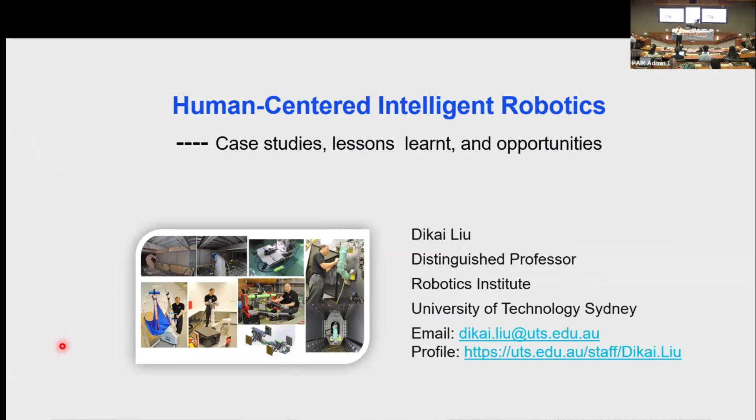Welcome, everyone. I think it's my pleasure to introduce my colleague for more than 20 years, Professor Dikai Liu. And if you read the CV, it's very comprehensive. I try to use my memory to introduce him. He has done research on robotics more than 20 years. He does both theoretical research and application, and most importantly, he has developed a number of industry robots applied in the real world. And later on you can see the video. I expect that, and he also gives a high-level summary about robotics, because we know there's so many robots, so many research areas, so many applications. He will give our summary. He has authority to do that because he has done this research for so many years, and normally we claim he's

maybe he's the #1 for robotics in Australia. And so he not only has good publications and good applications, he has a lot of media coverage. So later you might see some, and also real applications in many areas. And especially he's gotten a lot of awards. So from these 3 dimensions, I think he has done brilliant work. So I feel proud to introduce him for this seminar. I wish everyone, if you don't work in this area, you'll still feel this hour is worthwhile to come and listen to this seminar. Especially you can see the cases, lessons, and opportunities, and talk about human-centered intelligent robots. So I'll give him more time, and people will learn from his talk. Thank you very much. It's your turn.

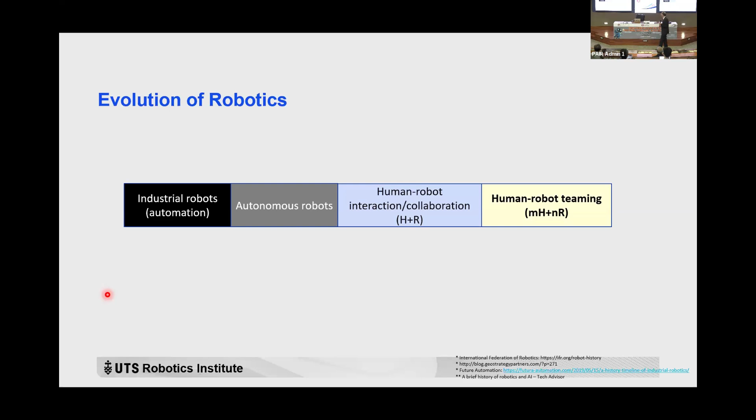When intelligent robots get into our daily environment, one very important aspect is that the robotics research we are going to do, or the robots we're going to develop, needs to be human-centered. This really makes robotics research a truly interdisciplinary area, because humans are one of the main focuses in intelligent robotics research. And when humans are involved, we have human behaviors, psychology, ethics, and culture. All of this should be considered in robotics research. This is really where we can see more and more collaborations among researchers across all those research fields. So human-centered intelligent robotics has become more and more popular, attracting attention not only from researchers, but also from people like engineers and others.

We have been seeing videos or news about autonomous cars or humanoid robots. Those autonomous cars or humanoid robots are designed for humans, but they may not take enough human aspects into account. So human-centered intelligent robotics really need to prioritize human needs, like human values or capabilities. This is one of the significant differences between autonomous robots and human-centered robotics.

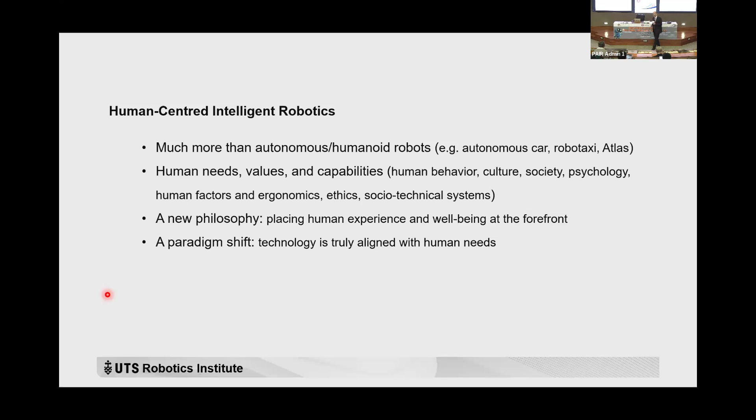This introduced a new philosophy, because humans' experience and well-being are placed at the forefront. It's a paradigm shift as well, because technology needs to be aligned with human needs. So it's a new way of thinking, a new angle of thinking here.

Human-centered robotics design principles, in addition to what we know like functionality or usability, we have to take other things into account. For example, usability, employability, safety and trust. Trust becomes a very important issue between humans and robots, or among robots.

UTS robotics research started in 2003, and that was the time we got the ARC, the Australian Research Council Center of Excellence for Autonomous Systems, in partnership with the University of Sydney and the University of New South Wales. That is the time UTS started robotics research there.

Then in 2009, I initiated the theme or research program of human-robot collaboration. I've been happy with that initiative, and since then we have been doing a lot of research in this topic.

Back in 2018, I proposed to establish a robotics institute at UTS. The reason I proposed that is that I really wanted to see the shift from purely technologically-focused research centered on robotics to a more interdisciplinary research center, or what we call the institute.

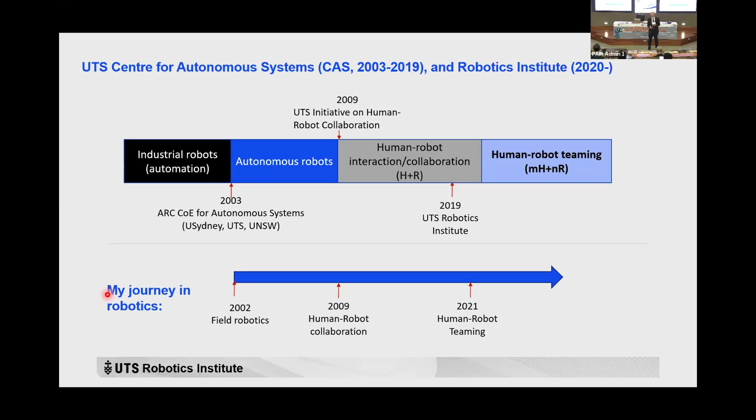My journey in robotics research started very similar to the journey of UTS robotics research. I first started doing robotics research with a focus on field robotics, based on robots operating autonomously in the field environment. Then I started working on human-robot collaboration in 2009, and in 2021, I started working on human-robot teaming, with many people working together with many robots.

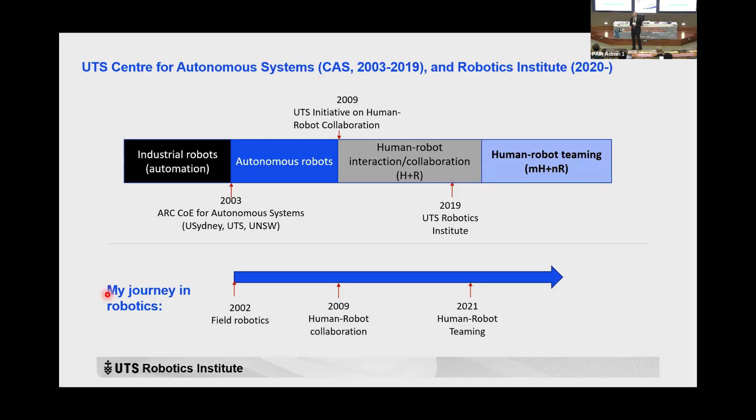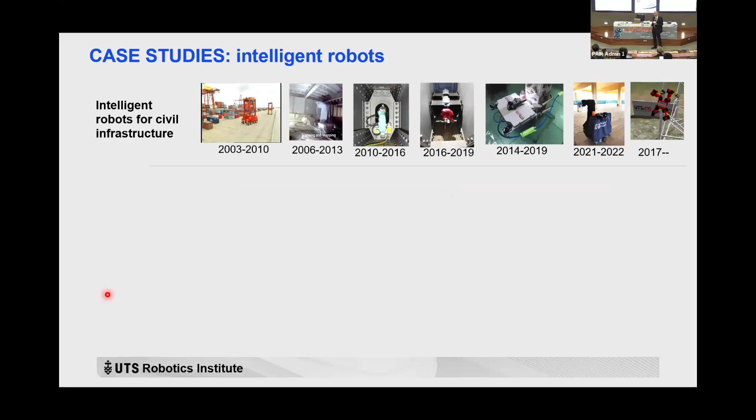Here are many of the robots my teams have developed. I put them into categories: the first is intelligent robots for civil infrastructure maintenance and construction. The second is about a single person working together with a single robot. The third is about multiple humans working together with multiple robots. I will talk about many examples here, which I call case studies.

The first area I'd like to talk about is robots developed for civil infrastructure maintenance and construction. Here is one of the robots we developed. You can see this is Sydney Harbour Bridge, a quite famous bridge with a steel structure. Maintaining such a bridge is really a big task.

Many people work on maintenance of the Harbour Bridge, not only for inspection but also for removing the rust and old paint and then putting new paint there. This is one of the operations, for example using high pressure sand or grit to remove old paint and rust, then putting a new coat. You can see the working environment - it's very difficult for people to do the work.

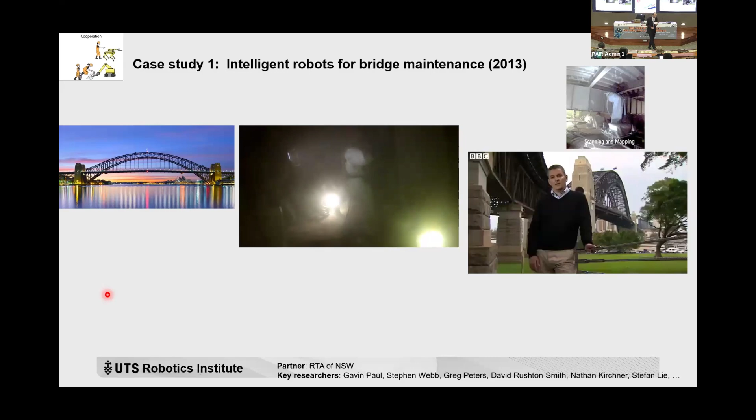We started to work on this project back in 2006, working together with the bridge maintenance team. The robots use sensors and cameras to navigate unfamiliar terrain. The technology is the result of a six-year collaboration between the University of Technology Sydney and the New South Wales state government. We put the robot into the bridge structure, which wanted ways to protect workers from lead paint and other hazards. The challenge for researchers was to build a machine that could work in such difficult conditions.

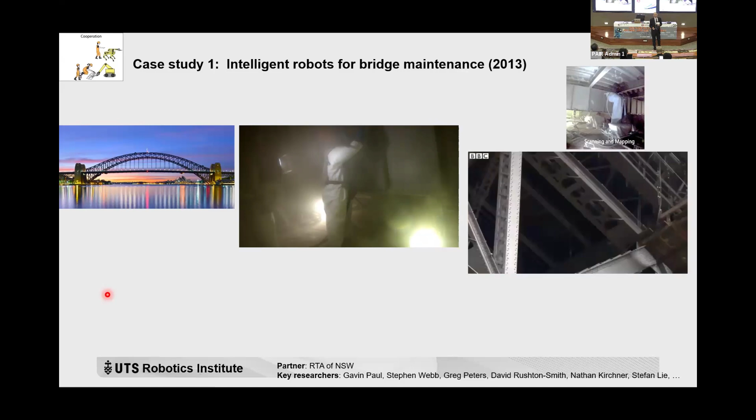The Harbour Bridge was opened in March 1932. It was an engineering wonder then, and still is today. It's held together by more than 6 million rivets and is a vital cog in Sydney's overstretched transport network. It's an unknown, very complicated and cluttered environment. What this project did, or the main focus of this project, was really to try to improve humans' health and safety.

Because you saw the video, it's very difficult for people to do this kind of tasks. Productivity, efficiency or cost are focuses as well, but not the primary focus. The primary focus is about health and safety.

With this robot or this technology, the robot can do the perception, planning, and control by themselves. Human workers just provide assistance to the operation of the robot, just to do the monitoring and also for quality control. So you can see the difference from purely manual operation to autonomous or intelligent robots doing the work. Then the working condition of human workers is really improved.

What we have learned from doing this project, that was back many years back. This was a very challenging problem at that time. Although we had sensors and really good computing systems, for a robot to do this kind of task with a performance comparable to human workers, it was very challenging.

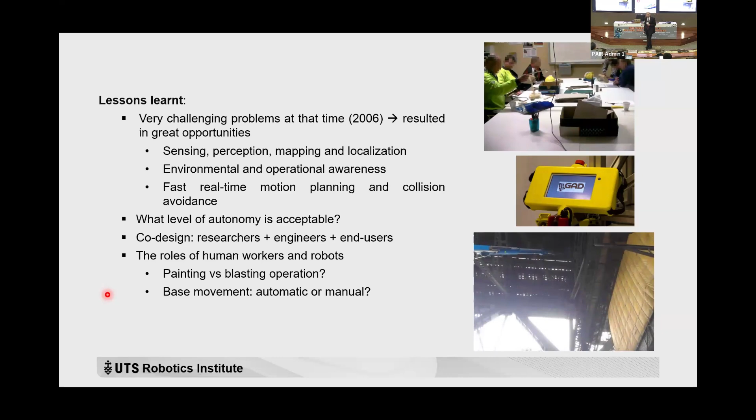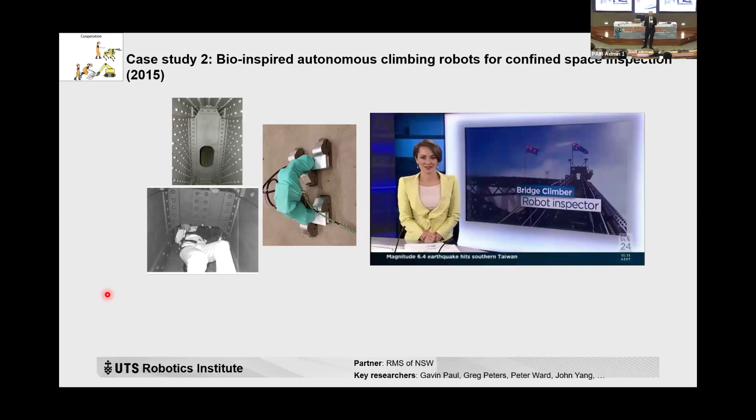The only option is to have a robot there to do the inspection and maintenance. But the challenge is that rivets are everywhere, and the partition plate every 6 to 8 meters has a small hole. How can we have a robot get into such an environment? The Sydney Harbour Bridge was a very big challenge. So we developed a robot, just like a caterpillar, tested it many times in the Harbour Bridge, and by the end delivered it to the Harbour Bridge for inspection of confined space.

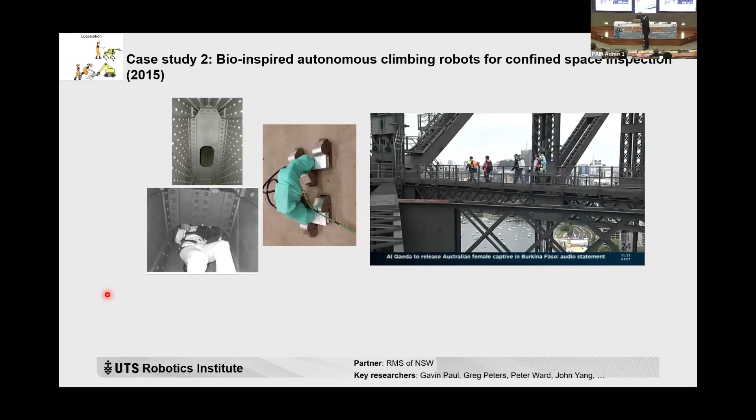With this, we call this robot a semi-autonomous robot. The human workers basically stay outside, not inside the confined space, monitoring the operation of the robot, controlling quality, and providing high-level instructions. That is what we call supervised autonomy - human workers provide high-level instructions based on humans' knowledge and experience, and then the robot does the hard job.

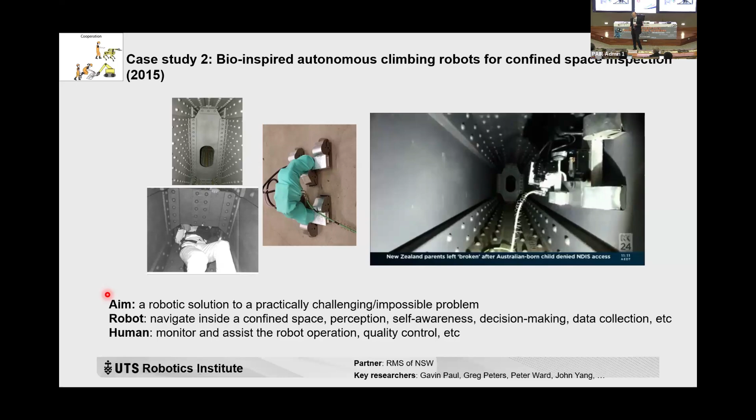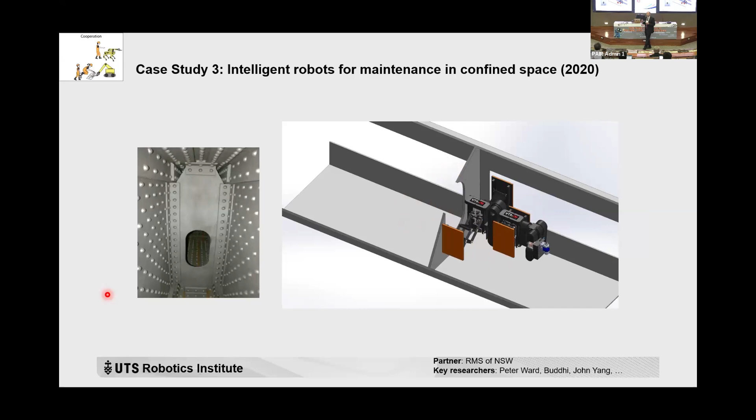So this is another example. Of course, after the robot inspects the environment, what if the robot finds somewhere requires maintenance, for example, to remove the rust, to do the painting, to do the vacuuming? The climbing robot you saw before does not have the payload or the capability to do the maintenance work.

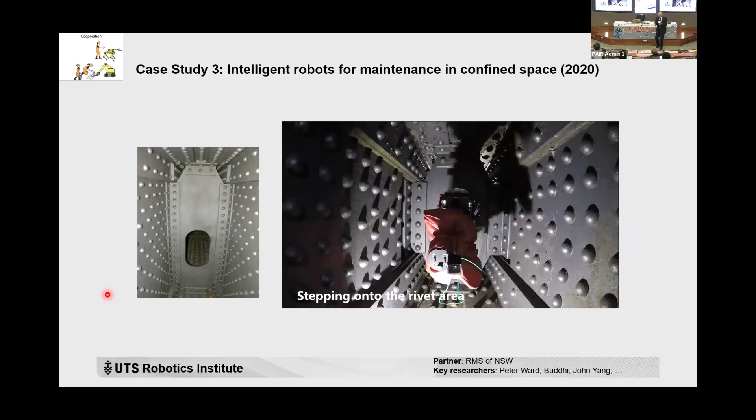Then we developed another robot, like the wall pusher. We'll call it the wall pusher. So they can get in with the body to move around, with the arm, 6 degrees of freedom in the front, with the nozzle or the tool to do the maintenance. You can see the robot can really go through this small hole from one side to the other side and step onto the safe area without rivets.

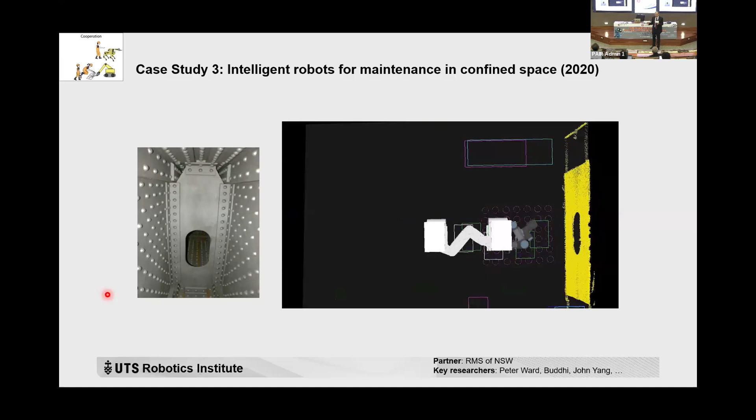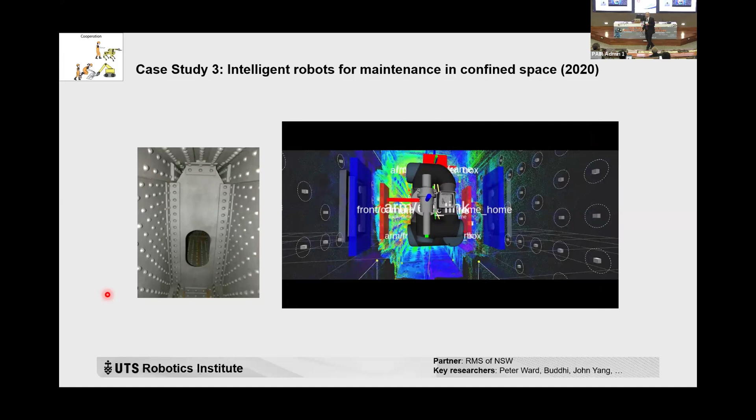So this is a third example of robots we developed for the maintenance of the confined space or the steel structure. Of course, this technology can be used in many other kinds of confined spaces, for example ships or vessels inside, basically a lot of this kind of confined spaces. So this technology can be used there. You can see the robot can do the blasting, the vacuuming, and also the painting as well.

So we had so many challenges, not only from research but also from the development and practical deployment of such robotics technologies. First, from a research point of view, one of the important challenges we addressed is really about the physical capability of the robot. How can a robot move and support itself in such a complex environment?

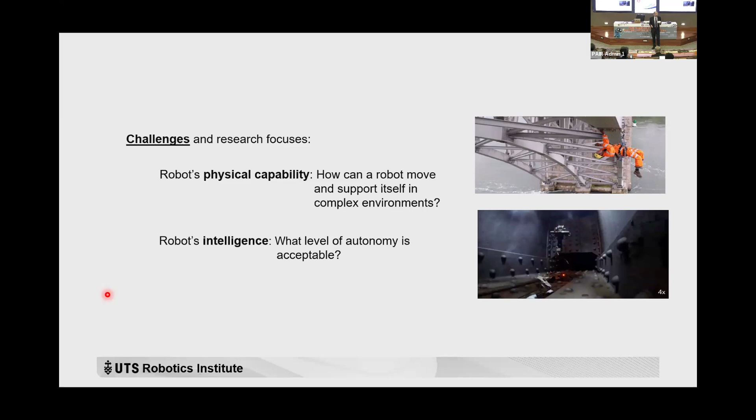The second one is about intelligence. What kind of level of autonomy do we like the robot to have to do this work? To answer these questions, of course, we did a lot of research.

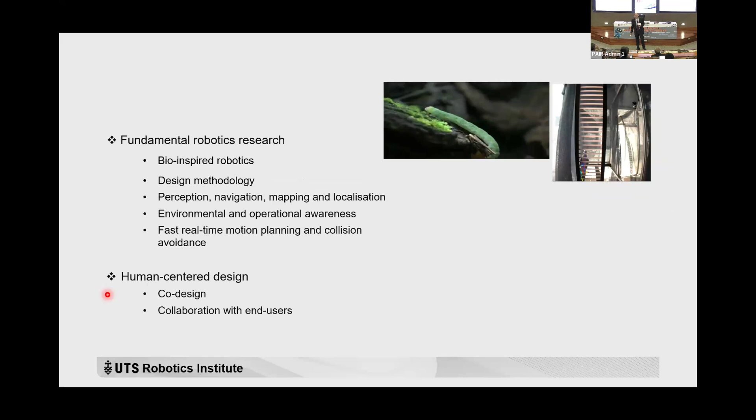For example, looking at this kind of caterpillar and ants, like ants are very good climbers, so we looked at these biological systems. By the end, although we got a lot of knowledge by studying ants or caterpillars or birds or others, there are a huge number of constraints, what I call engineering constraints. For example, the torque-to-weight ratio of motors, or it's very difficult to find that kind of actuation system or actuators that provide a very high torque-to-weight ratio.

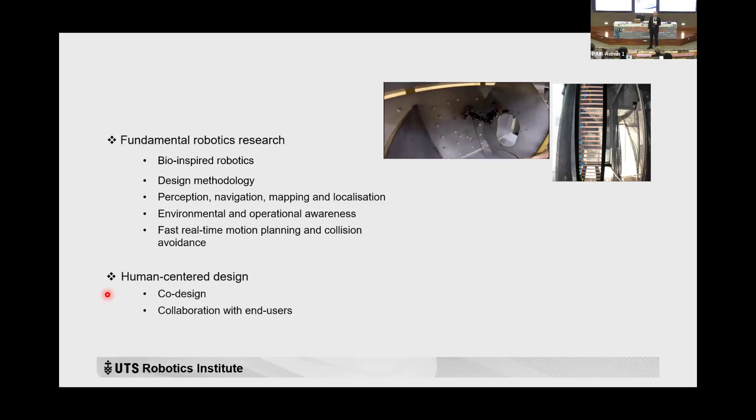Another challenge we had was really about the intelligence, or the level of intelligence. If we are going to have a robot in such an environment, the robot has to navigate inside the environment, use sensors to collect as much information as possible, or I should say the information needed for the robot to conduct the operation expected, like the rust around. The robot also has to move around in the area with a lot of rivets, transferring from one surface to the other. So a lot of challenges there.

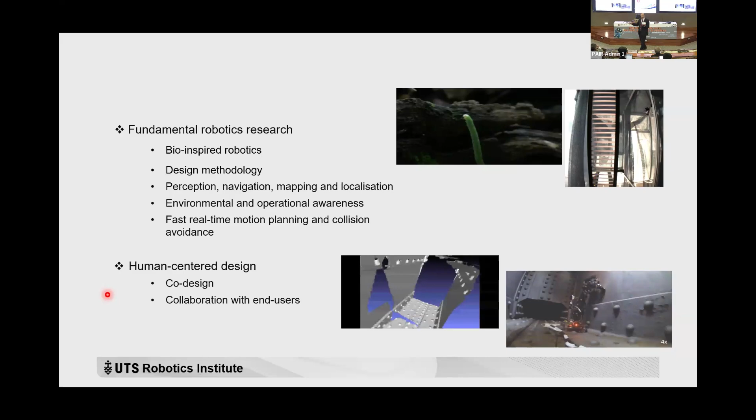So those are the research challenges we have addressed, and also planning as well. The robot has to plan its motion based on the environment, and we don't know the environment beforehand. So before the robot reaches that area, the robot does not have this knowledge of the environment, so it has to plan this on the fly. We learned a lot from doing this research.

So as I mentioned, besides the research challenges we have been addressing, there are many others. I really found human-centered design is really important. As similar to the example I mentioned before, we really need to value the humans' preferences and their needs. That is very important.

We also need to design the interface. For a human worker to monitor the operation of the robot, a user interface is needed. So how can we really design a user interface or interaction interface that human workers will like? We had so many workshops working together with the end users, with a researcher who is an expert in industrial design, what we call collaborative design.

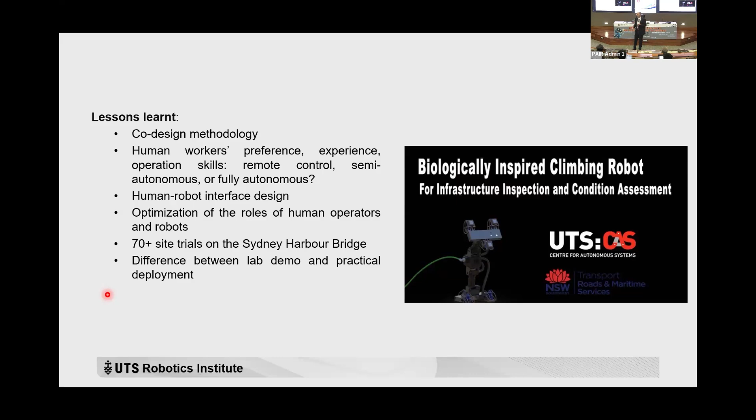He was one of my research students, and he was really in charge of this kind of co-design. By the end, the user interface was really accepted by the end users, because they claimed they had ownership, since their environment was factored into this kind of system or project.

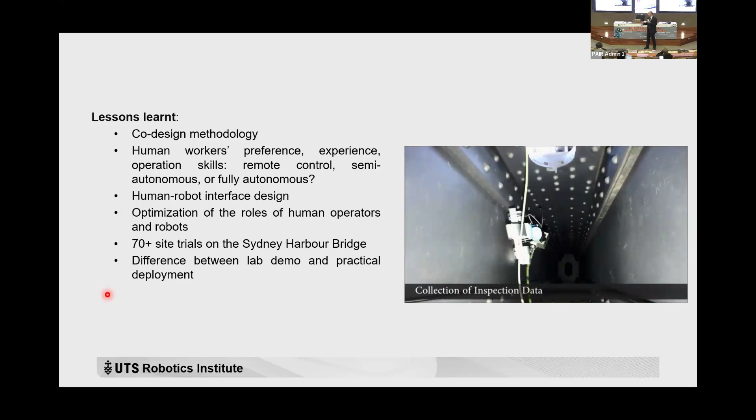Another thing very important is about the roles of human workers and the robot - how we can optimize or come up with a satisfactory role distribution between human workers and the robot. This is something we discussed many times with the end users. Human-centered design is so important here, and this is the future as well.

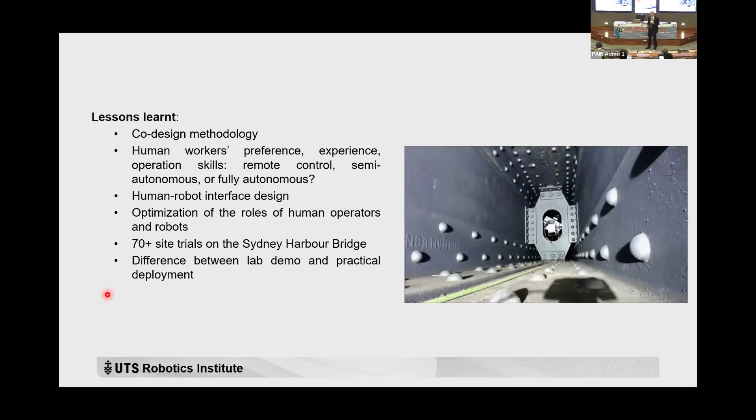One more thing is going from the lab to the real environment. This is a very big effort. Research, development, and deployment - there's a big difference there. It requires a team with researchers like postdocs, research engineers, really working together, and also with engineers from industry partners.

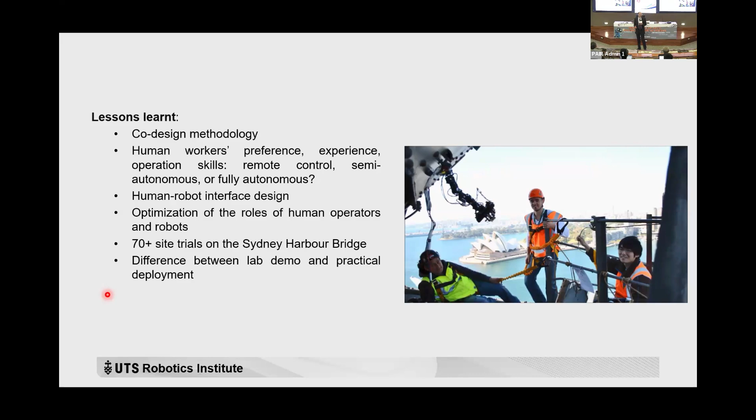Every time we were so confident in the lab, as we tested many times and it was very successful, I asked the team if they were confident enough. They said yes, should be okay. Then the next day they'd come back and say something went wrong. So this is really one of the challenges we've had. But we trained so many people through doing this project - this is a really important aspect as well.

In order to do the inspection or condition assessment, we have to remove the marine growth. That is a big ask. Around the world, divers still get into the water and use either mechanical tools or high pressure water jets to remove the marine growth before they can find out the condition and do the assessment. This is a very big challenge - imagine how difficult it is for divers to do this, particularly along the coastal area where water current is a big danger. So the only option is really to have a robot do the work.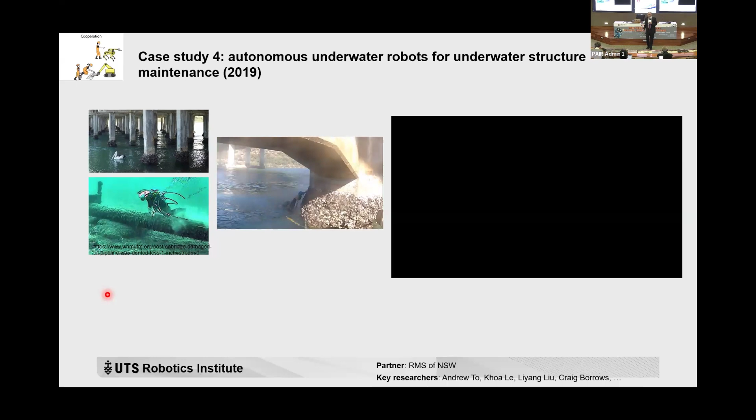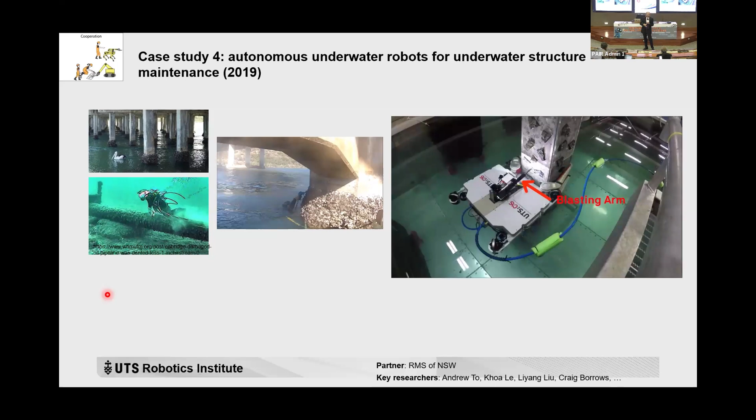So we developed a robot. This is the robot we developed, and it consists of 4 grasping arms. Basically the robot navigates above the water, on the water surface, or underwater to a bridge structure or bridge pile or underwater structure, then uses the arms to engage with the structure.

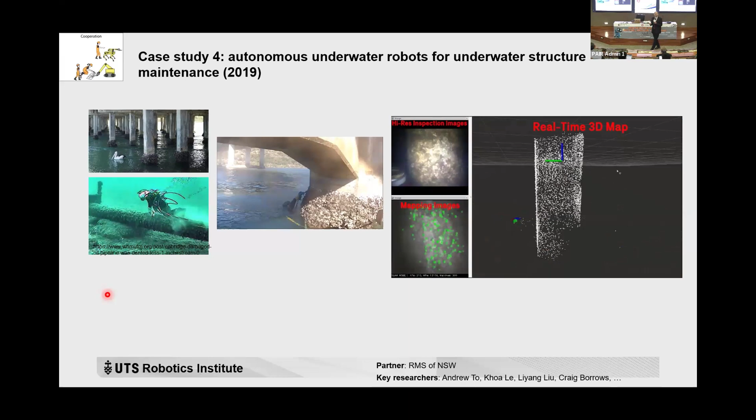After interacting with the structure, the robot uses sensors to build a map of the surface condition of the underwater structure, identifying marine growth, barnacles, or other types of growth. Based on this information, the robot does the planning, then does the cleaning - you can see the robot in the real environment planning and blasting, using the high pressure water jet to remove the marine growth. After the marine growth is removed, it collects information, does the inspection, and does the condition assessment.

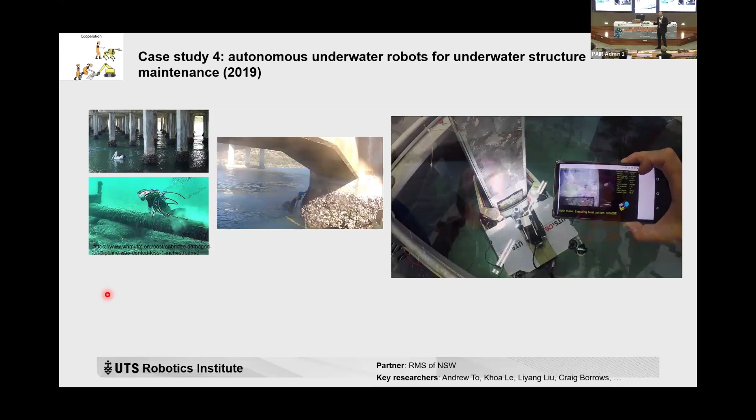Of course, robot learning and AI has been applied in this scenario. The main challenge here is really trying to address a problem where the current solution is manual operation, and divers are really tired of doing this kind of work. So health and safety is definitely the main focus, although we also talk about the sustainability of this kind of civil infrastructure.

With this robot in operation, the human workers only stay on the boat or on the shore, to monitor the operation of the robot and provide high-level instructions - again, what we call supervised autonomy.

We have developed many different prototypes - probably the team has developed 4 prototypes from version 1 to version 4. It was very challenging, because of the application environment and because of the user requirements. Also, the underwater environment could have very low visibility.

So how can we solve this problem? Water current could be very strong - how can we solve that problem? Particularly if there's a water current and the robot has to interact with the environment, that's challenging - we don't want to damage the robot. So we went through many generations of the design.

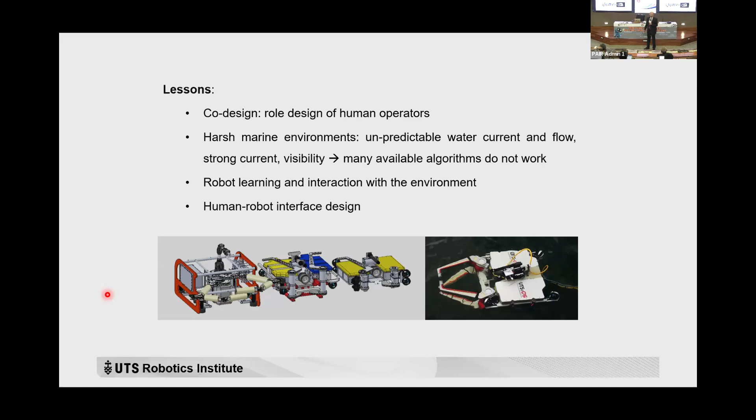Machine learning, for example, how we can equip the robot to adapt to a changing environment, was one of the problems we've been trying to solve. Honestly, we have not found a very good solution we're happy with yet. But a good thing is that within the last couple of years, AI and machine learning has advanced significantly, so we have higher and higher expectations and more confidence.

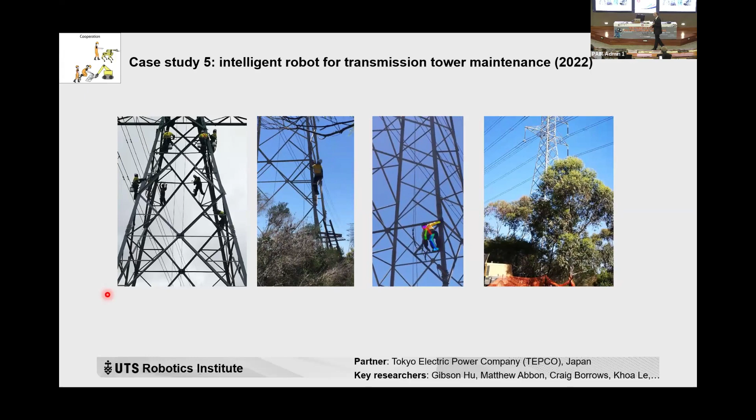This is the project, TEPCO, from Japan. They did a global search to identify someone who can work together with them to develop technologies to address this problem. We worked together with TEPCO for five years, and they went through many approaches for this research.

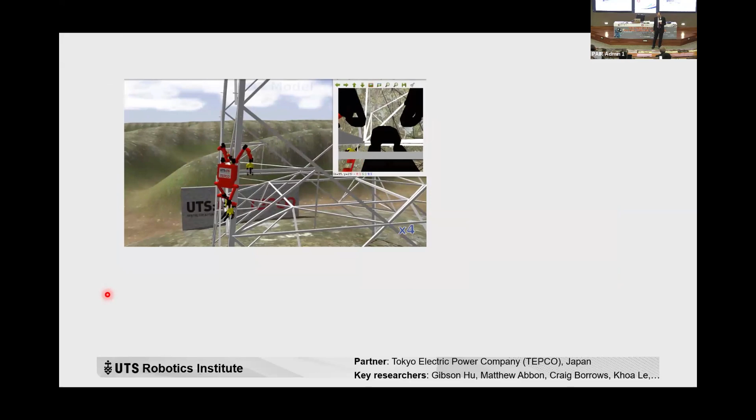This is the first idea we discussed and worked on together with TEPCO: can we design a legged robot like this? This robot would be able to climb up the transmission towers, do the inspection, and one of the limbs or hands would be able to do the painting or remove the rust or paint.

It was so challenging. After 2.5 years, TEPCO as the end user and us as the research provider discussed that we should change the approach, because we realized that if we continued this way, five years would not be enough to come up with a solution that could really help them solve the problem.

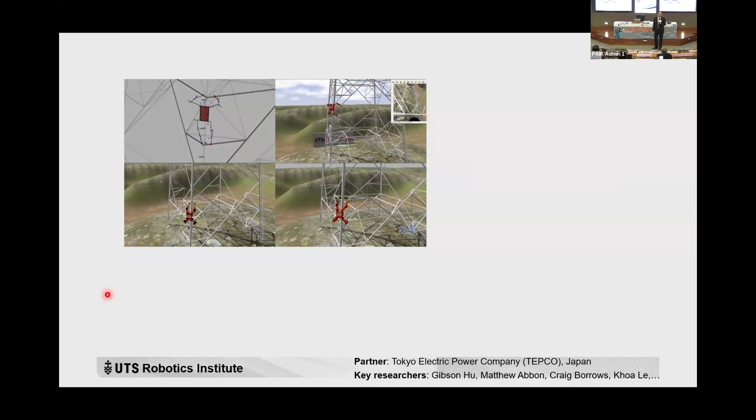By the end, we worked together to develop a robot which can be delivered to a tower. This robot uses sensors to sense the structure, localize where the structure members are, identify the surface condition, do the planning, and remove the rust and old paint.

But there was one more issue, an environmental one. TEPCO in Japan really didn't want to use blasting technology, mainly because they wanted to protect the environment. So by the end, we had to work together with them to apply laser cleaning technology to do the work. But again, this was another challenge.

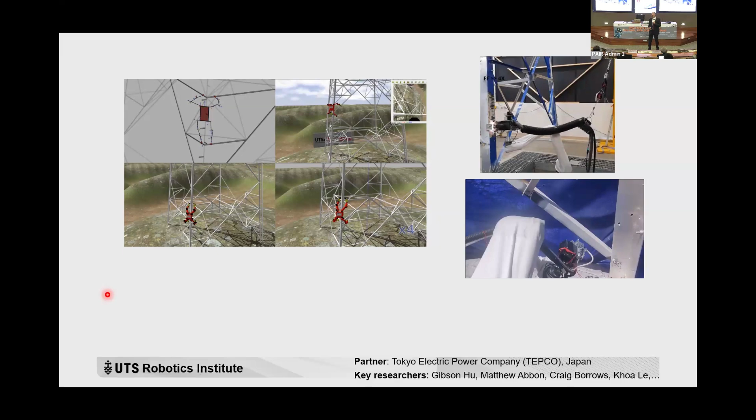Finally, we developed and delivered robots for TEPCO, who are now deploying this technology for maintaining their transmission towers. Again, the main focus here is the health and safety of the workers, although we are also focused on the sustainability of the energy infrastructure.

Due to time, I'll probably need to move faster. I already mentioned some of the engineering limitations, and it's a very challenging problem: how can we really combine the strength of humans with the strength of robots, along with environmental considerations?

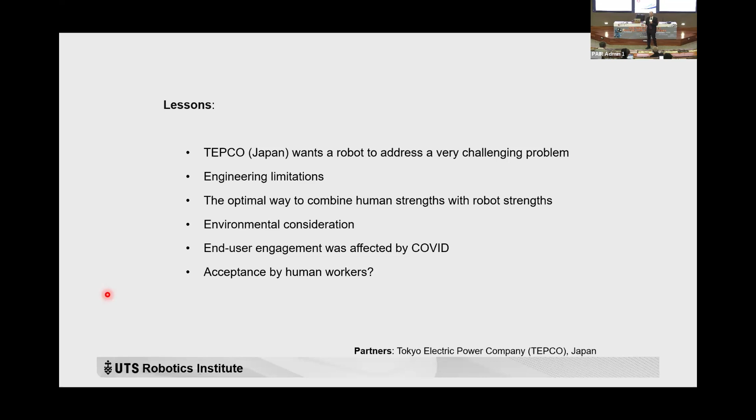Due to COVID, we were supposed to do a lot of field trials in Tokyo, but because of that challenging period we could not do this. So in terms of how or to what level the operators are accepting this robotics technology, we could not do much work on that. I'm hoping in the future this is one of the tasks we'd like to do together with TEPCO.

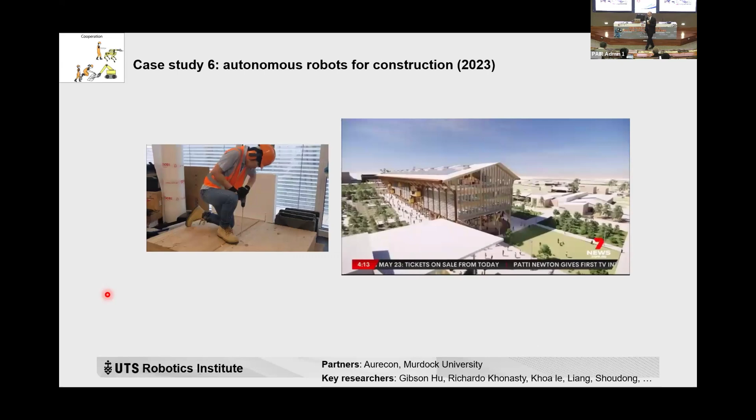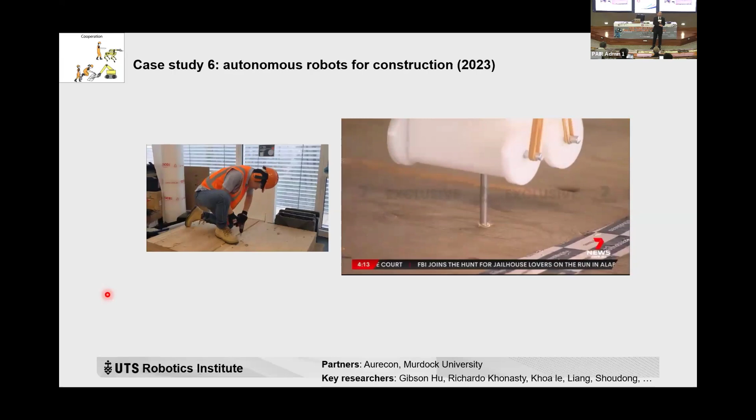Another example is the robots we developed for construction, such as for timber building construction. We developed a robot which can navigate on the construction site, localize itself, find out where the screws should be placed, and then put the screws into the right places. This is a project we did with several companies in Australia, and it was very successful.

The quality, the efficiency, the accuracy, by the end, what they found, what the industry partners found is much better than human workers. So now we are further developing this technology for more testing. I will talk about this later.

So what we also learned through those case studies is really about the acceptance of human workers - how humans really accept the intelligent robot. So this has been what we have been learning, an issue we have been learning, and has been a topic we have been doing research on.

The different groups of users or workers have different expectations. What can we do? How can we really enable the robot to adapt to different user groups? And expectations at the beginning and at the end of the project are always different. At the beginning of the project, they say, 'I like the robot to do this.' Then by the end of the project, they say, 'I hope this robot can do this and that as well.'

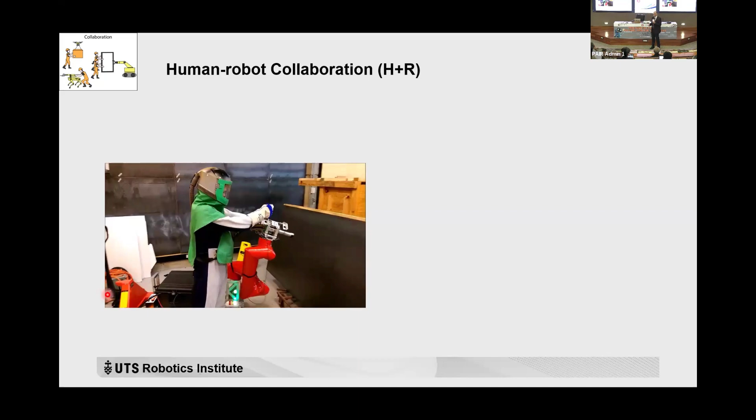My understanding here, based on my experience, is that developing a fully autonomous robot or semi-autonomous robot is easier than developing a robot that can really work together with human workers. Although we have been saying we'd like to combine the strengths of human workers with that of the robot, what is the way to do that?

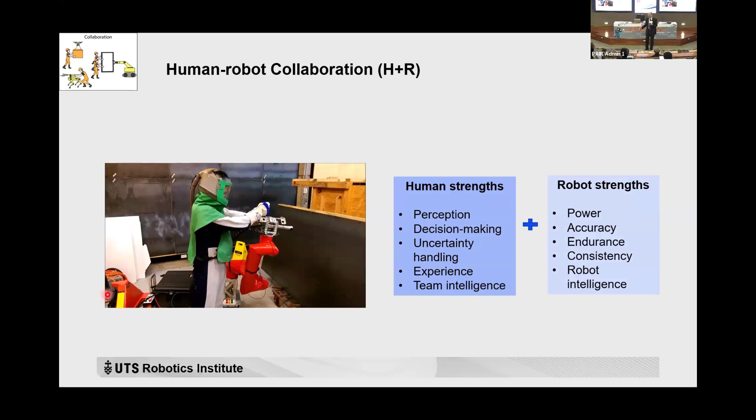We have been trying to answer this question, for example, for this application scenario. And the reason we picked this scenario is because our industry partner was interested in it. You can see how difficult it is for a human worker to do this. Then we developed a robot which can work together with the human with physical contact.

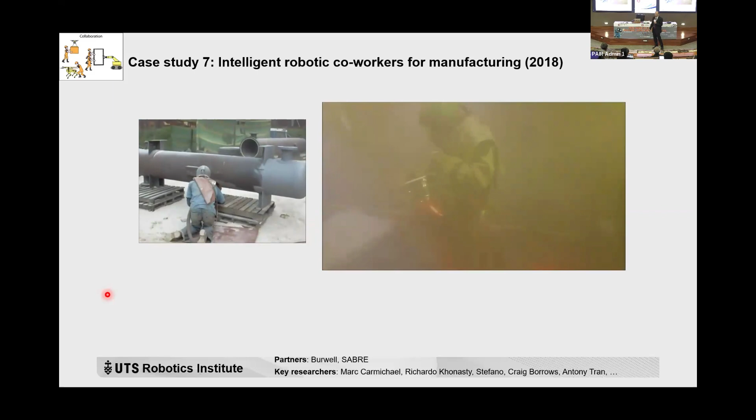This robot was tested in a real kind of environment. And what we found was that by the end, our industry partner took this robot and started to deploy it in their business.

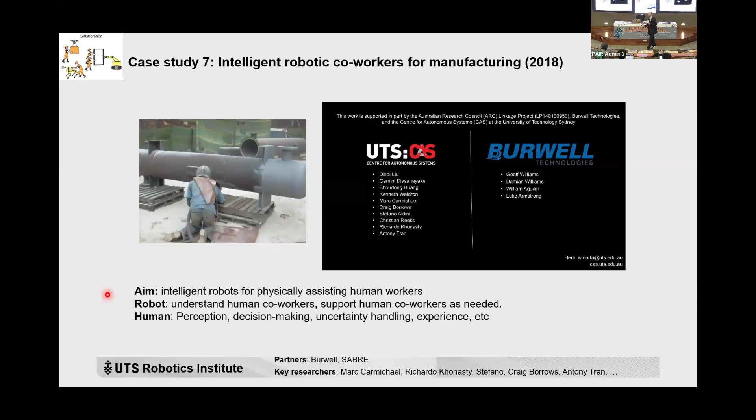So what is really important here is whether we can have a robot to physically assist a human worker, not just socially. Socially you can do it in a different way, but physical assistance is really a big challenge - the perception, for example, human strengths like perception and decision making, and how we can really combine this with the robot.

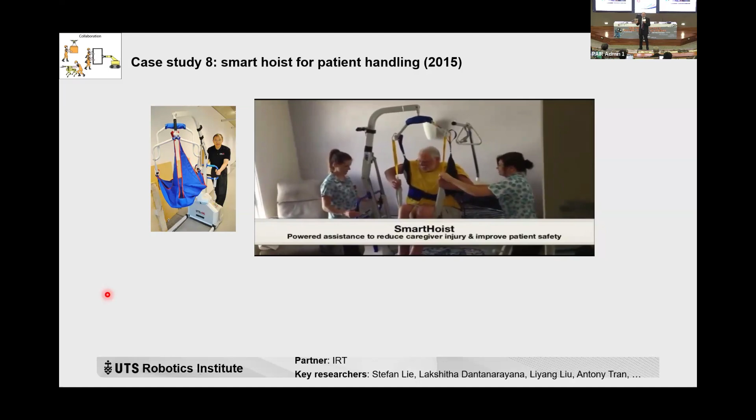Another example here is that we developed a robot that allows nurses to very easily move the robot and handle patients, for example, from the bed to a wheelchair and from the wheelchair to other places.

From a research question point of view, this is very similar to the previous examples, but this is for a different application. With this robot, the nurses can easily move the device around.

We also have many sensors placed on the robot. These sensors help monitor the operation or allow the robot to have operational and environmental awareness while being used to move or handle patients. With this robot, the work condition, health and safety of nurses are significantly improved. So this is a very good aspect - similar technology, but for a different application.

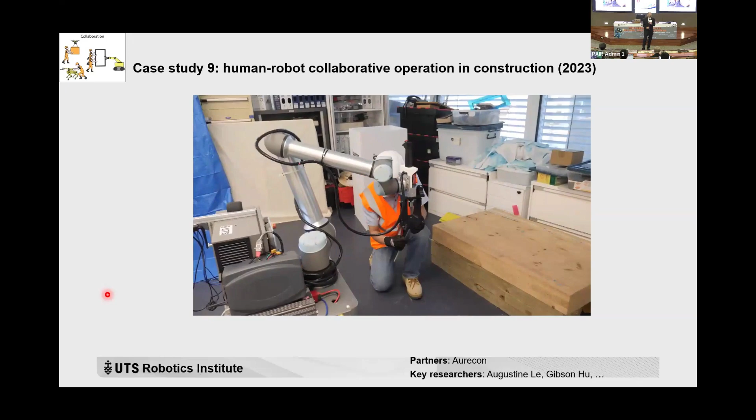Another example, again similar technology, but in this case we have the robot, and the human worker holds the robot and moves it around, and the robot can figure out what this person wants to do and then does the work. For example, in this scenario, the human worker just moves the robot to somewhere and tells the robot, 'you are going to install the big screw in that place.'

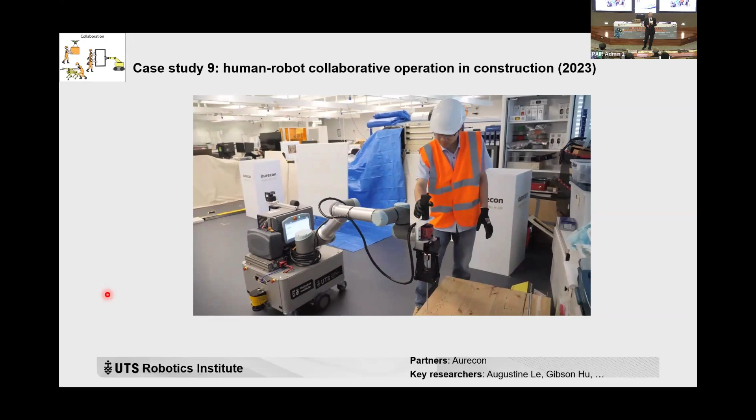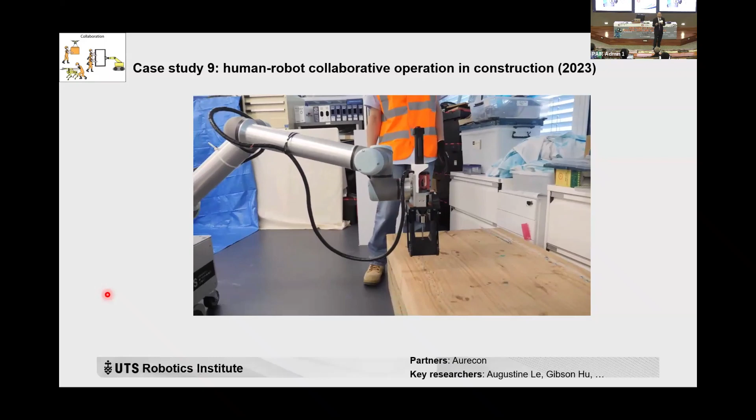In that case, we do not need the robot to really find out where the screws should be placed and also navigate around, particularly in some areas on a construction site - for example, along the edges or in environments with very limited features, which make it very difficult for the robot to localize itself. So if this is the case, we can have this robot do this - you can say the robot does the hard job and the human worker does the easy job. This is another example mentioned here.

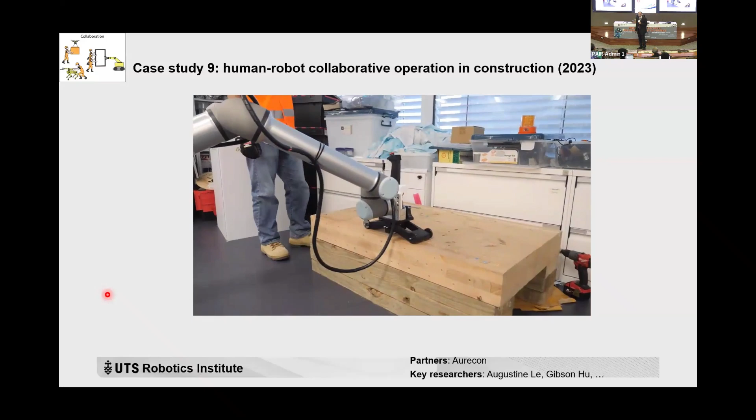Having a human and robot working together is harder than developing a semi-autonomous robot. A really important part is how can we get a robot to understand human workers. This is very challenging. We have a challenge to understand our collaborators, right?

Even when you are shaking hands with your friend, you get a lot of messages while shaking hands with your friend, is that right? But if you are going to have robots working together with you to do the real task, then you realize the robot understands you as much as possible, and significantly reduces your workload—not only physical workload, but mental as well.

Involving partners and users is another issue. Many new research questions—this is part of the opportunities we have in the future. Because in the future we'll have robots really in the work life, in the office, in the industry, or in our home. For example, you have robots in your kitchen, and you like to tell the robots to do whatever you like. With the increase of intelligence of robots, this will become a new norm. And so many questions arise here.

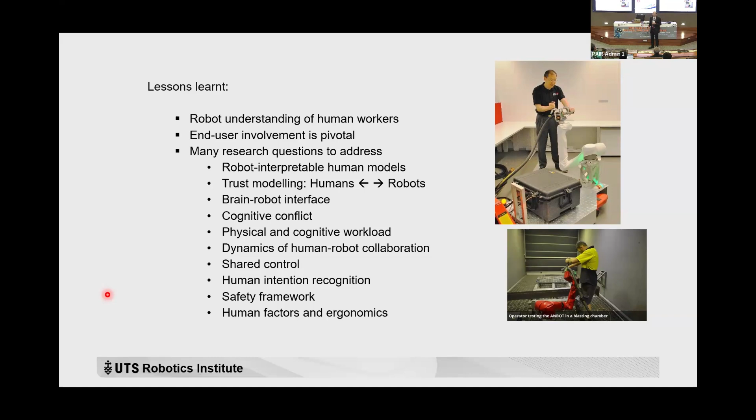And also trust modeling—we realize the human trusts the robot, and the robot trusts the human, and the brain-robot interface, and many other things. So if you are interested, this really offers more opportunities for us to do more research here, particularly interdisciplinary research. Of course, safety is one of the key challenges when humans and robots work together.

I mentioned the physical strengths, for example the arm, and we'd like the robot to provide the support expected by the user. Your expectation could be different from my expectation, so we need to consider what kind of support, and those human factors and ergonomics have to be considered as well.

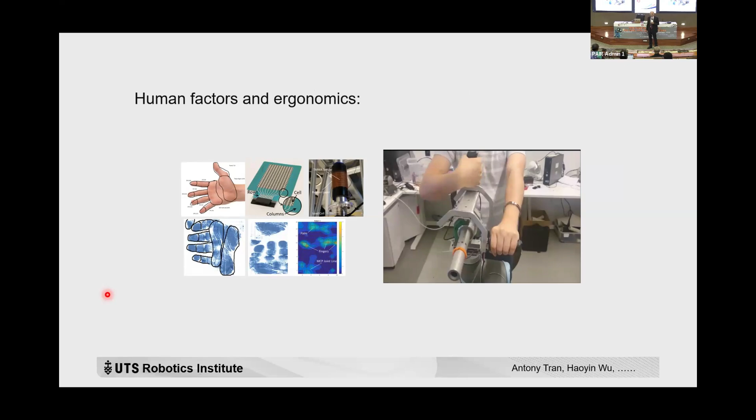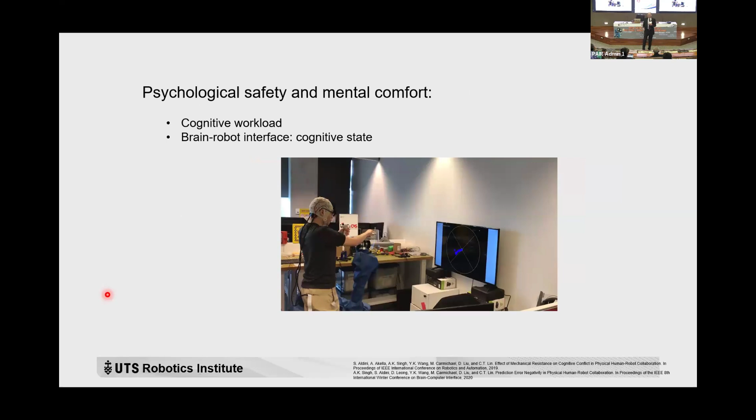And psychological safety and mental comfort—we don't want the robot to really increase the pressure or the stress when we work together with the robot. Many issues there, so that's why I'm working together with psychologists to handle this kind of issue. And confidence, of course—how can we really build the confidence. I probably won't talk about this too much here.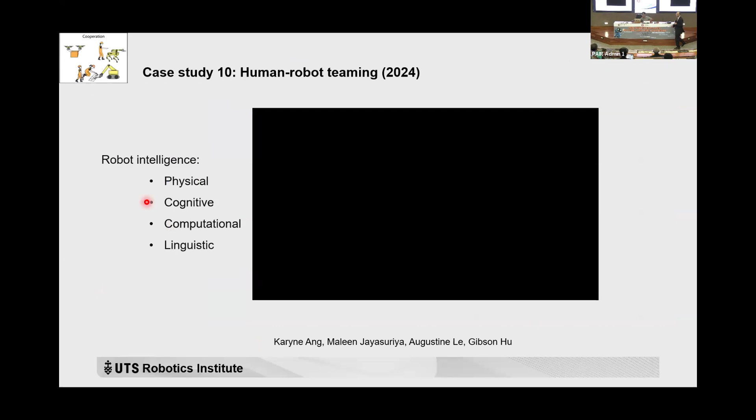Can I just click the video? All right, okay, then probably, yeah.

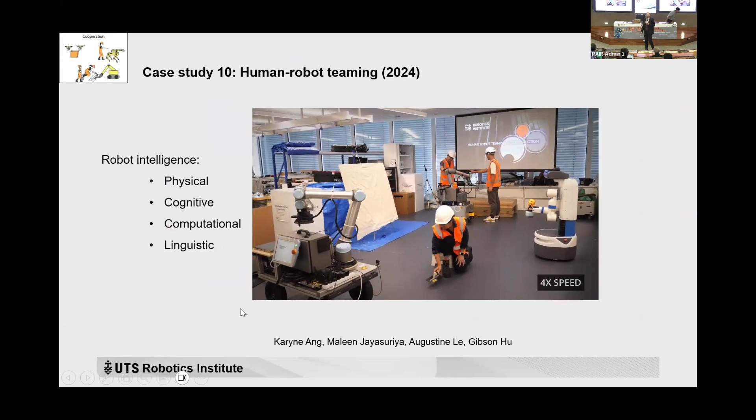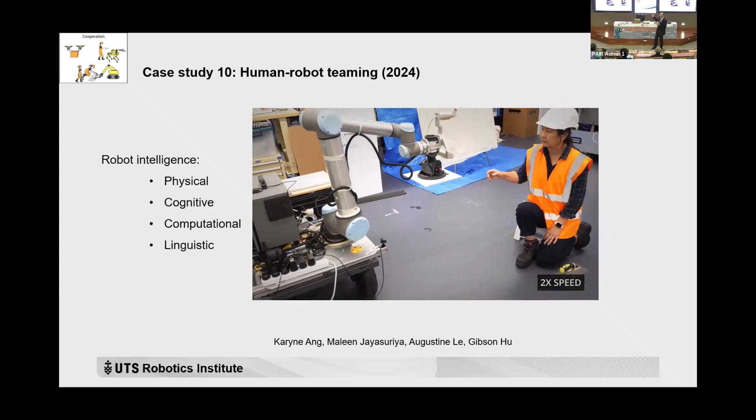Tiling operations, okay, started—this is the video I'd like to play. Basically, we have three people working together with three robots. One robot drops the tile, bringing tile to the chosen location. One robot interacts with the worker to do the painting. And one robot just does the installation once the tile is ready. A large language model has been implemented in this demo, which helps with communication between human workers and the robots.

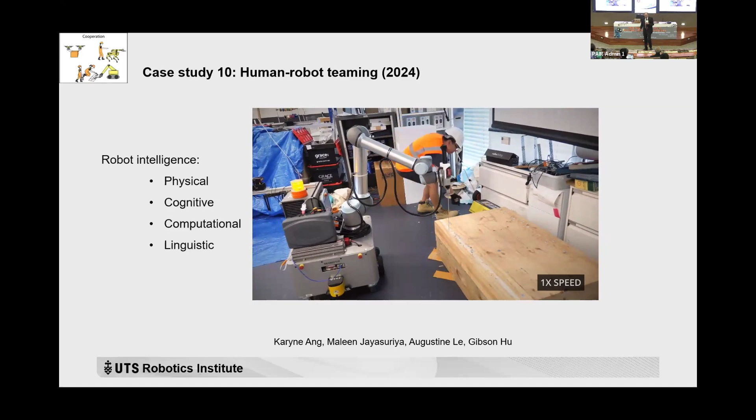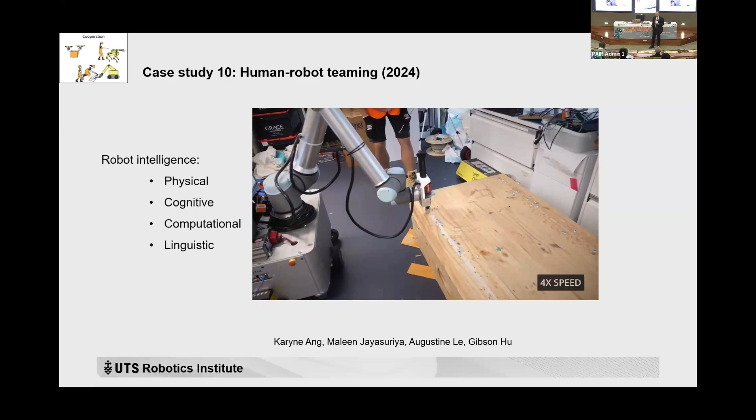Hey, Fetchbot, can you start the painting operation for me? Affirmative, no worries, mate. Painting operation is now underway. I'll have this wall looking as stunning as the Sydney Opera House at sunset in no time.

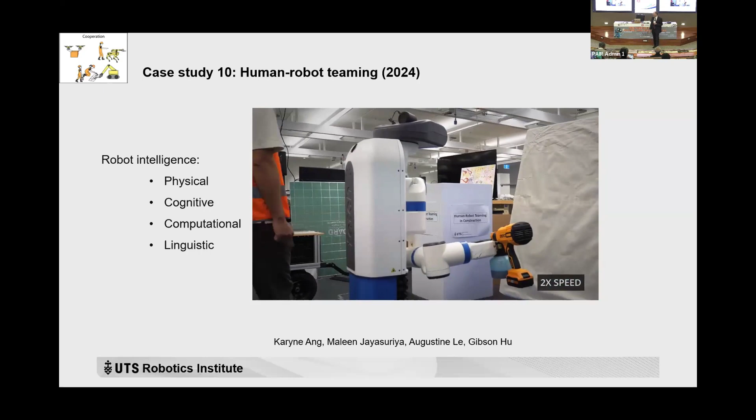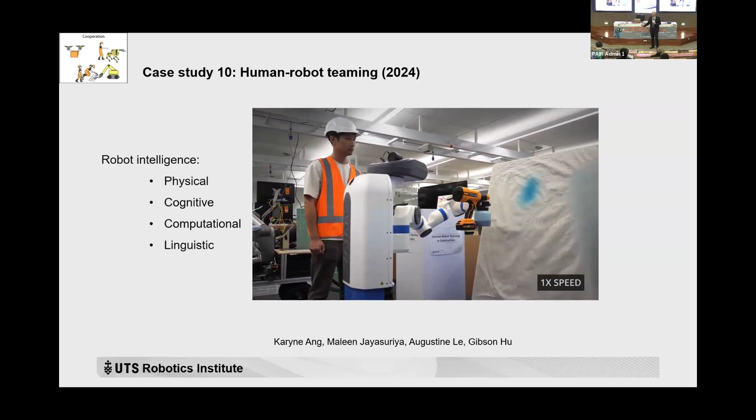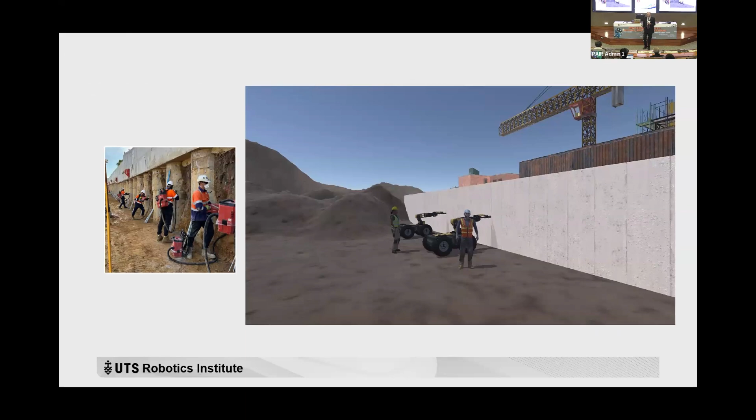Because a large language model is implemented here, sometimes we don't have a way to control what the robot responds to the worker—that's one example here. Due to time, another scenario is on the construction site in the field, where we can have many robots working together with many people, and the human worker just tells the robot what to do, then the robots do the work.

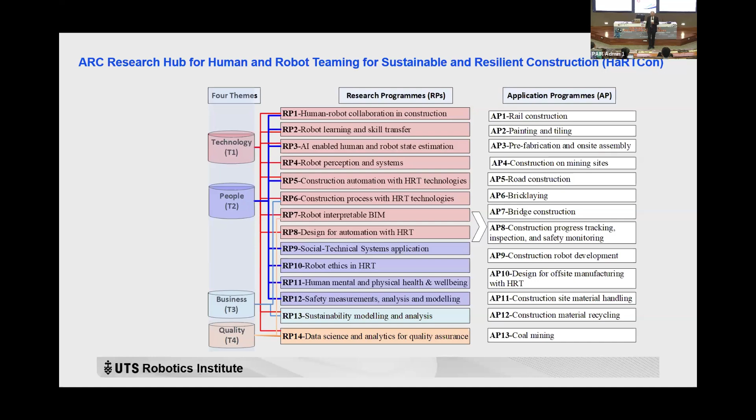Then we have 14 research programs from technology to people to business. The outcomes of the research programs will be applied in many different applications, like road, rail, bridge, transport, and others. This is a 5-year program, starting this year and finishing by 2029.

I mentioned this - 70 years ago the 3 laws were proposed. The first law talks about the safety of humans when humans and robots work together. So a robot may not injure a human being - that is about the safety of human workers.

The second one is about human authority - basically a robot must do what the human worker tells the robot to do. That is the human authority.

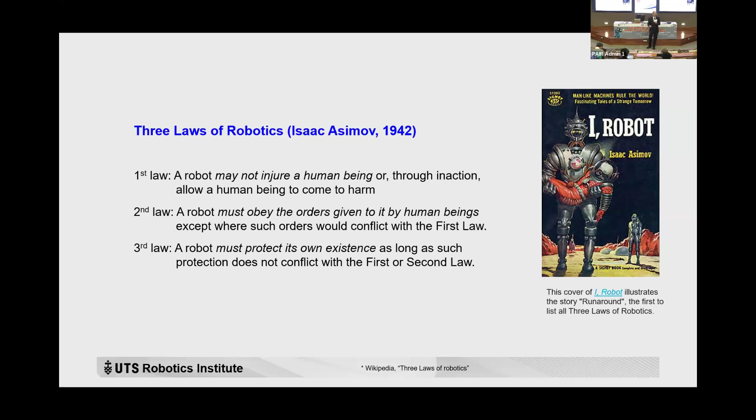The third one is about the robot itself - the robot should be able to protect itself, particularly when the robot works in a dynamic or unstructured environment, particularly with human workers.

After 70 years, do we have to introduce new laws for human-robot collaboration? This is a question many of you may have, so I will leave this for you to think about. For example, a robot can do whatever it likes, as long as...

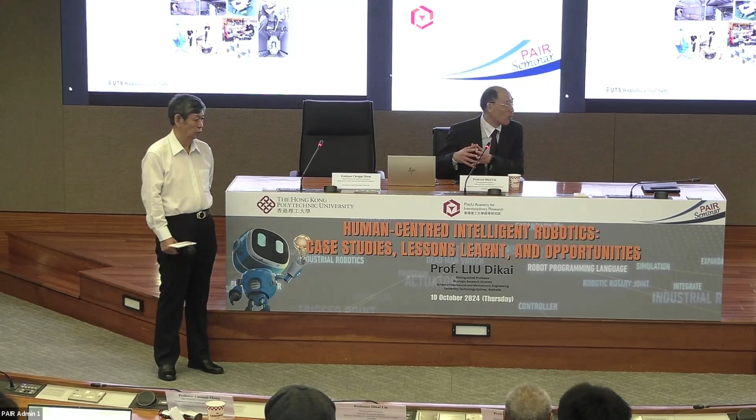So whether you are going to, for example, develop a humanoid robot, you may focus on the really technological aspect, to make the robot really capable, like climbing stairs, or working in a very unstructured or complex environment in terms of locomotion or navigation. Of course, you can focus on that aspect. Or you can be more focused on really implementing or developing new models, like multimodal language models or many other different models, to increase the intelligence of the robot, to make it more intelligent so it can do the tasks by itself.

This is an open question. It's really an open question. So it's very hard to answer where you should locate yourself in the whole, very broad spectrum of robotics research. But my general answer is really find the one you are most keen and most interested in.

Thank you. Yeah. Thank you.

I think this question is very interesting because I see a lot of young people here. Prof Liu not only does research, but also supervises PhD students and many engineers. So you can ask not only technical questions, but also about PhD topics, career, and the relationship between research and engineering. This is a good opportunity, because if not now, you'd have to email him, and he's probably too busy or might overlook your email.